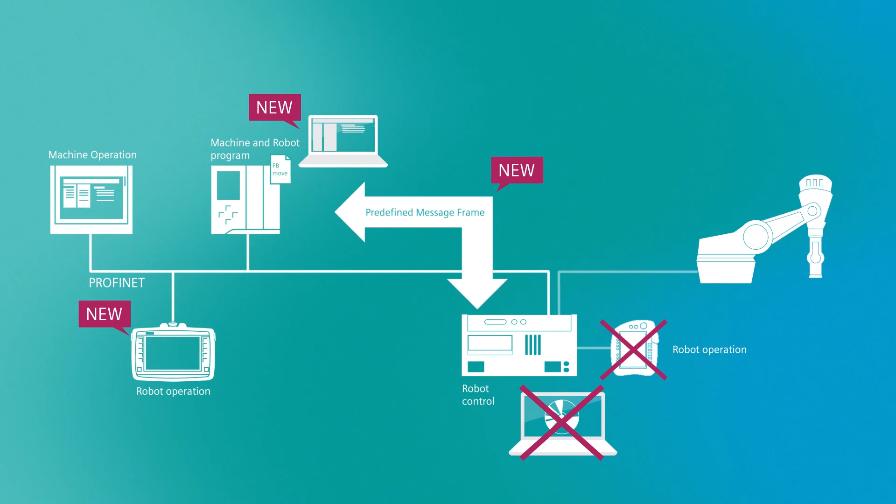Robot manufacturers such as KUKA, Denso, and Stäubli provide function block libraries that allow the robot to be programmed in the TIA portal. These libraries contain function blocks for various traversing movements, such as linear traversing or stop robot. This creates an opportunity to perform complete engineering of the system and robots solely within the TIA portal.

We also offer you the chance to perform robot operations via a Siemens HMI. For this purpose, we provide you with a standardized user interface for different robot manufacturers. We would like to show you this now in a live demonstration. Exactly, Tobias. Let's do that by taking a look at the application example in the TIA portal.

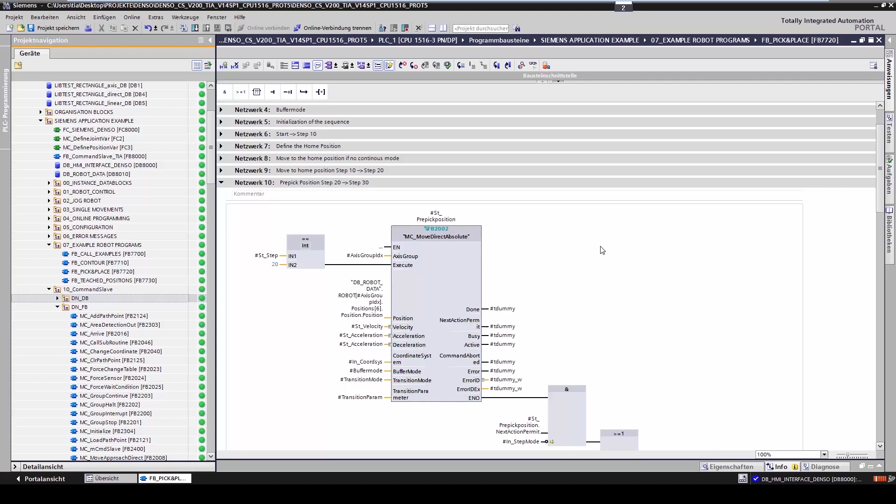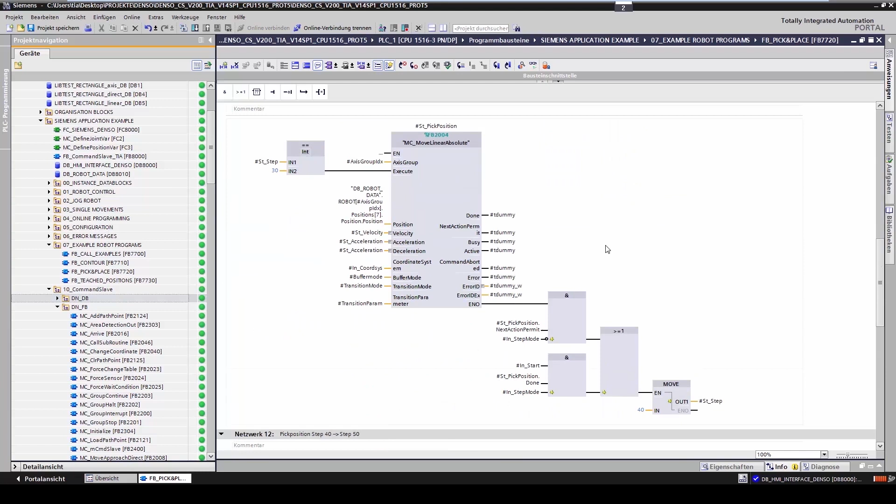In this practical example, you will find the Denso library for the TIA portal and various functions that we have prepared for you. You can also see an example of a robot program where different commands have been called up. We've also prepared a new user interface for you to enable robot programming and operation. You can see the start screen of this user interface here.

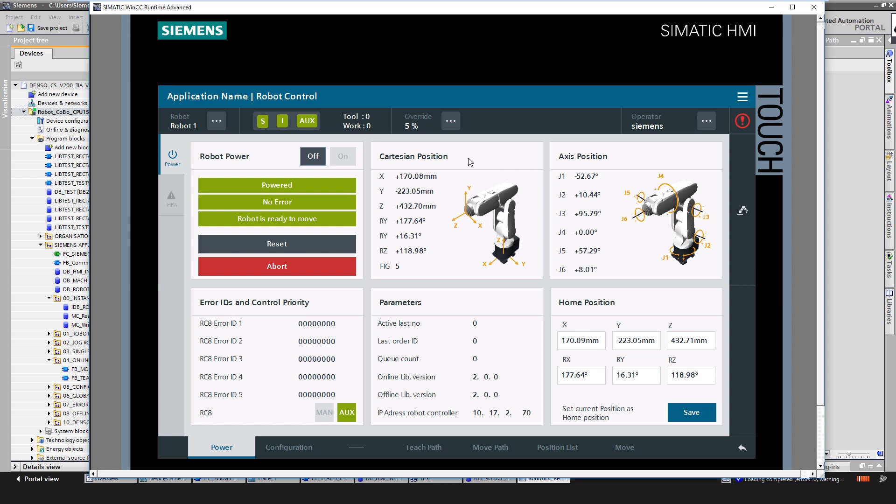And this is where you can switch the robot off and on, and you can also see various types of information about the robot, such as its position. You can also define operating ranges for the robot and assign names, enter tool offsets, or even the payload. To move the robot, click on Move. You have different options for moving the robot.

For example, you can jog the robot in the work coordinate system, but also in the joint coordinate system, or tool. You can also have the robot perform a linear traverse. In the joint coordinate system, you can move the tool center point or set point-to-point interpolation. First, we'll use the joint function to move the robot to the starting point.

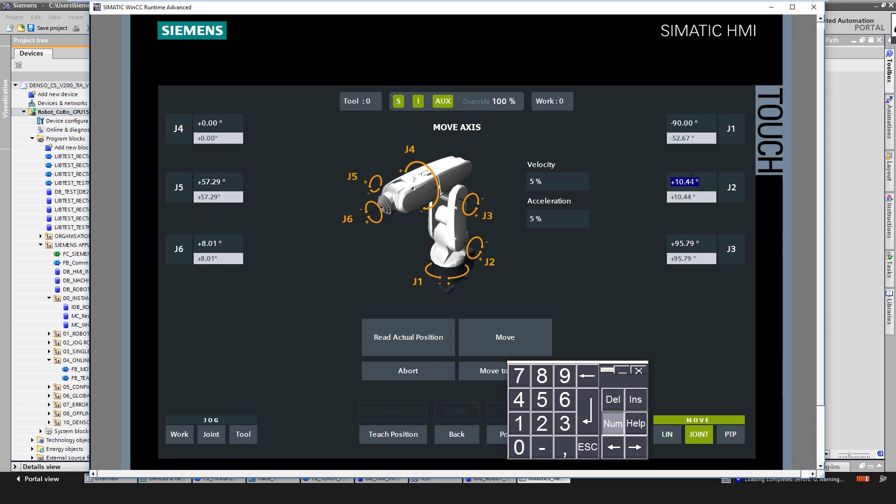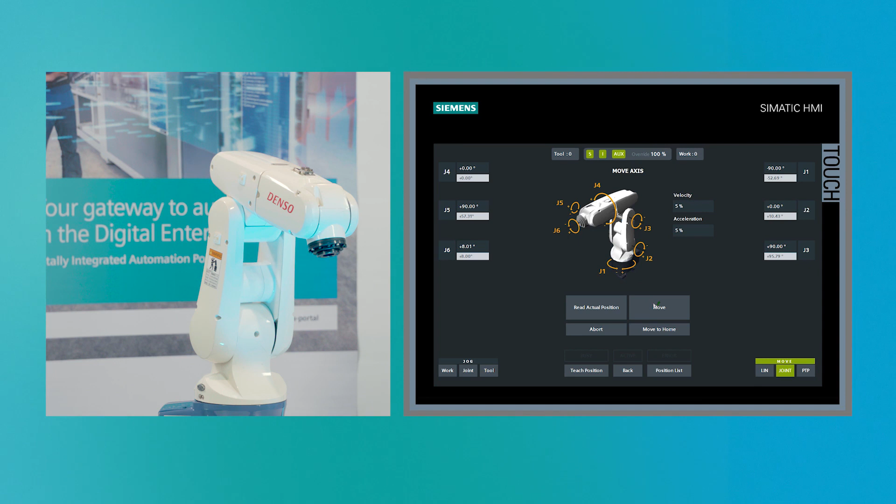To do so, first we'll read the robot's current position and input the following set point values: J1, minus 90 degrees, J2, 0 degrees, J3, 90 degrees, and J5, 90 degrees. The robot moves until you let go of the Move button. Now we are standing at the starting point of our path. We teach this position as the home position.

Next, we move the robot to the second point. We do this in the base coordinate system. To do this, we once again read the robot's Cartesian position and enter the set point value 200 millimeters for the x-axis. We move the robot to this point and save this position as pre-pick position 1. Then we move the robot to 400 millimeters on the z-axis and teach this point as pick position 1.

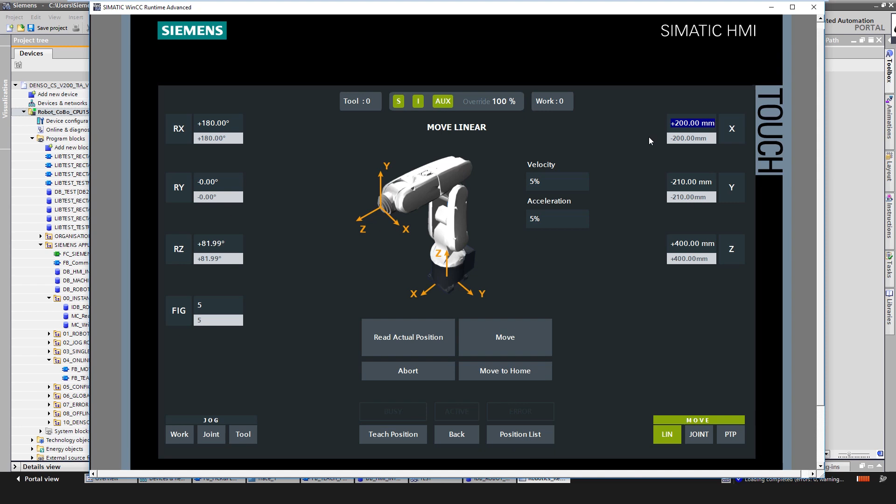Now we move to the left, from the robot's perspective, entering a set point value of 200 millimeters for the robot's x-axis. And we teach this point as pick position 2. And now we move the robot up along the z-axis to 495. And we save this point as pre-pick position 2.

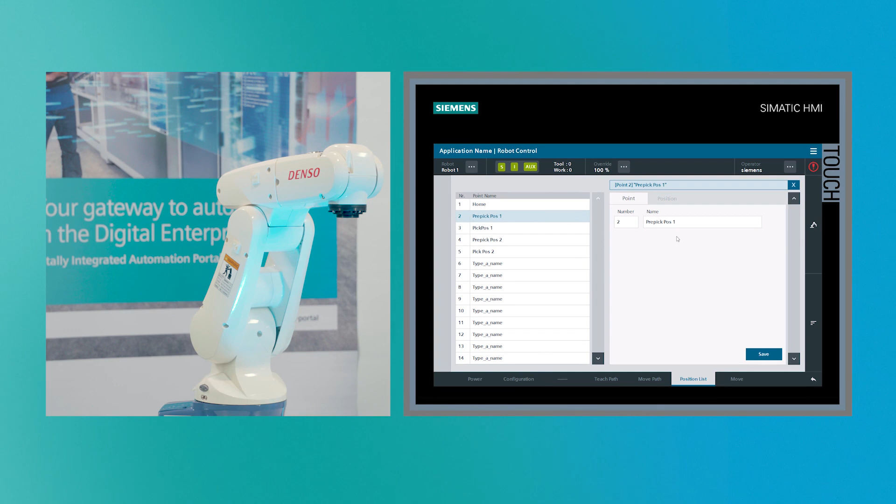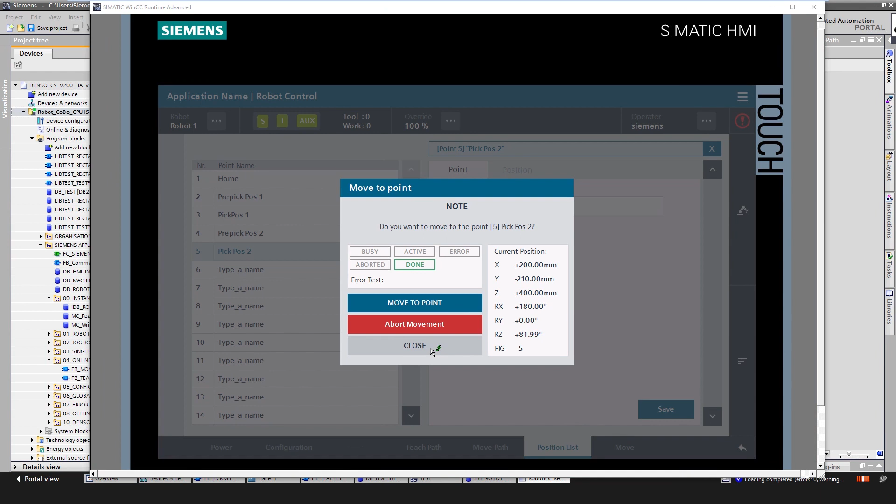We have created a point cloud, which we can see here in our position list. We can move our robot towards any random position. For example, pre-pick position 1 or pick position 2. Now we can write an online program in which we switch to the view Teach Path. So we're going to use Path 1, applying all the positions from the point cloud that we have taught.

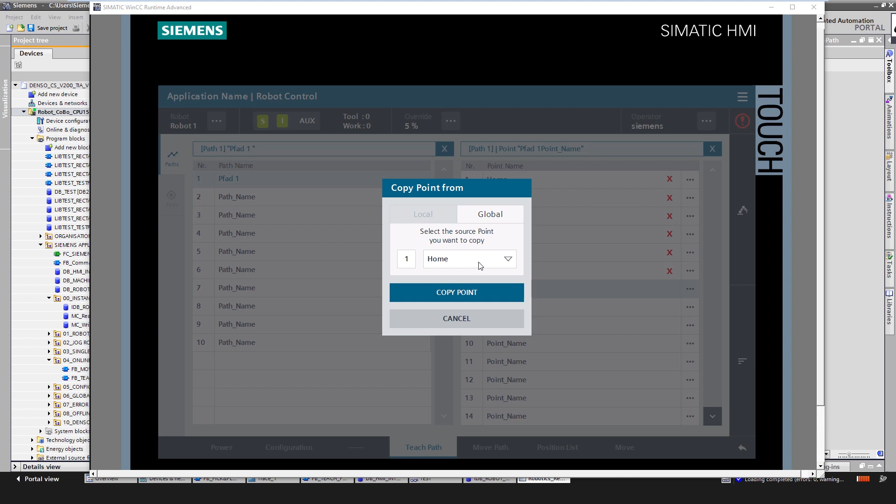The first point is Home, and the second point would be pre-pick position 1. The third point would be pick position 1, and the fourth point back to pre-pick position 1. For the fifth point, we move the robot to the left side, from the robot's perspective, to pre-pick position 2, and then to pick position 2, and back to pre-pick position 2. The last point is Home again.

You see an X mark here showing each point. That means that for each point, we still have to adjust a parameter, namely the motion type. With this parameter, we define the type of interpolation of the movement. In other words, PTP, point-to-point, or linear. For each point, we save this parameter as linear. And when the points have been completely defined, green check marks appear in place of the red X marks. Now we have green check marks everywhere. So the program is properly defined and ends at this red line.

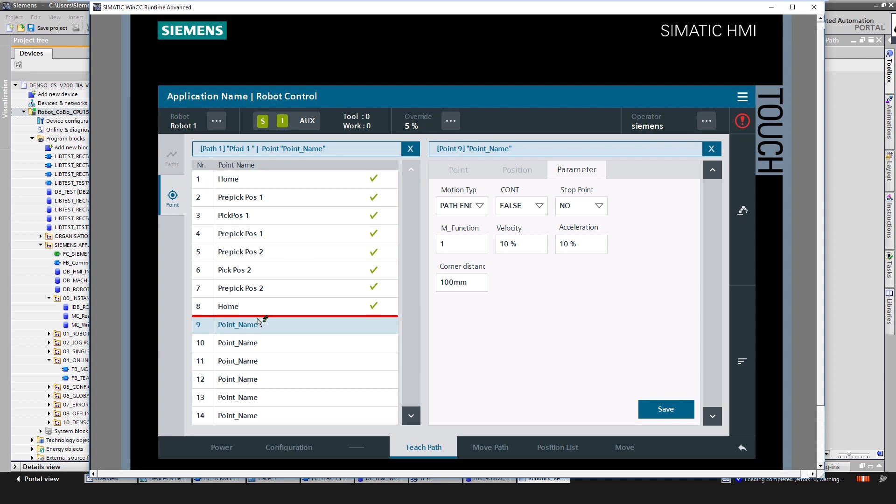Now we would like to test the program which we have written online, namely Path 1. To do so, we activate the step mode and set override to 5% and launch the path movement. The robot is located at the initial point, Home. Second point, pre-pick position 1, pick position 1, and back to pre-pick position 1. Now left to pre-pick position 2. Z downward to pick position 2 and back to pre-pick position 2. And back to Home. Now the program has been tested, and we can start it automatically.

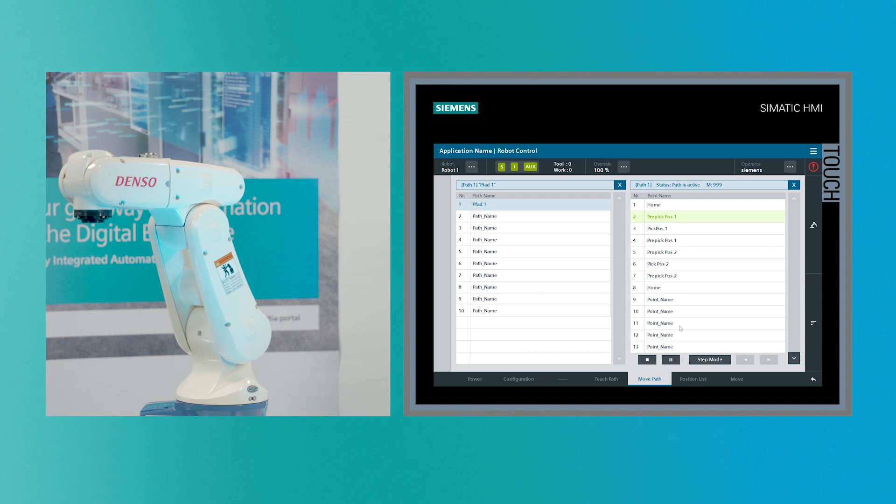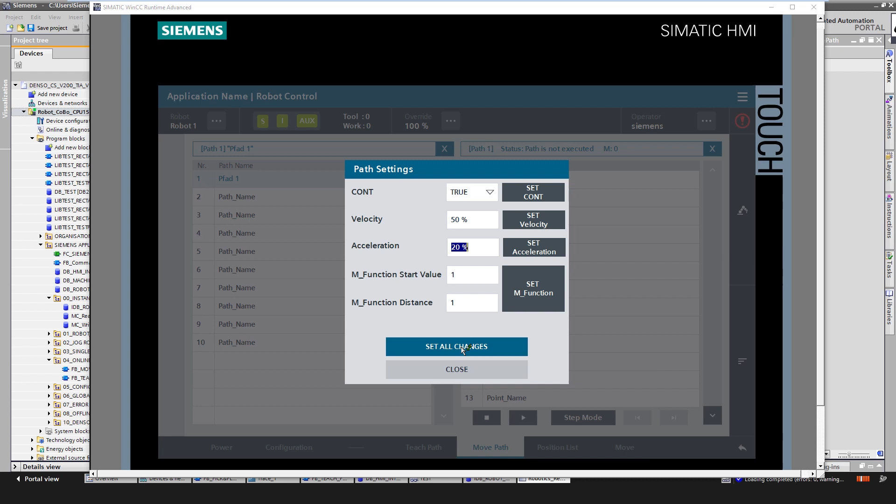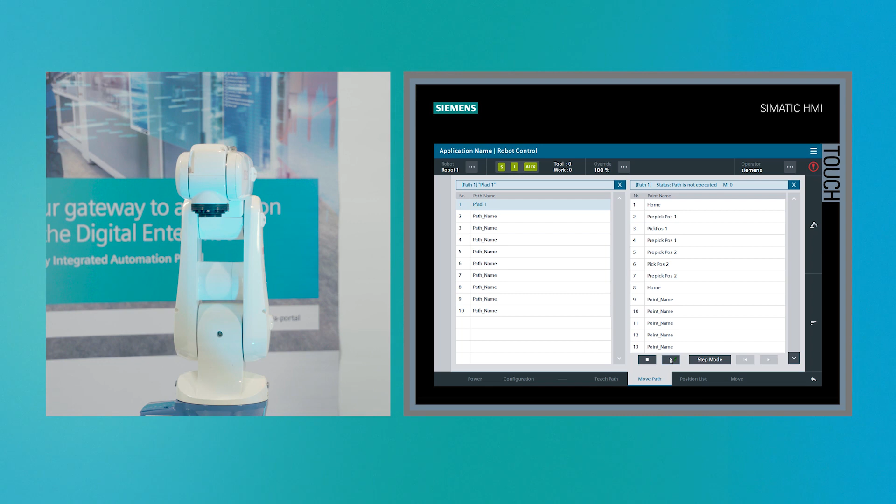Thus, we can see the entire routine that we have programmed online. Of course, we can also adjust some parameters for this path, such as blending or moving faster for more acceleration. We start the same path again and see that the robot is blending and moving faster. By doing this, we have completed the robot program. Yeah, and that's all there is to it.

Thank you, Ganesh. Let's summarize the benefits one more time. One engineering environment for you and robots, a uniform operating philosophy, manufacturer-agnostic robot programming, and last but not least, identical faceplates for the different robot manufacturers. As you can see, robot programming can be that easy with the TIA portal.